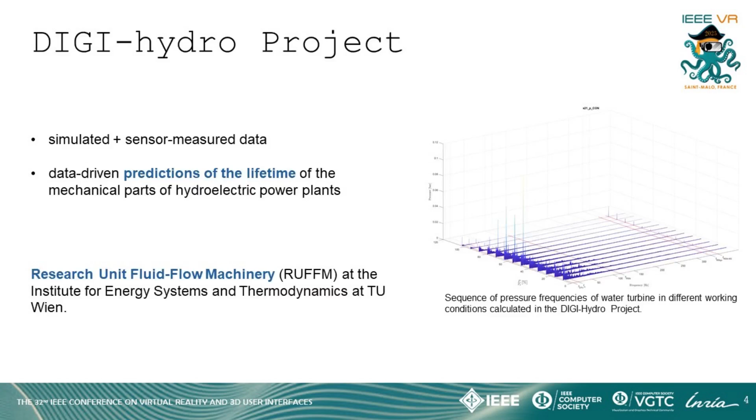The idea of an immersive analytics application resulted from numerous conversations with these experts. Two factors made them interested in an immersive environment for data analysis: the possibility of visualizing and interacting with many plots of sensor-collected data at once, and the combination of abstract and spatial data, with the possibility to locate the data visualizations in the relative position of where they were extracted.

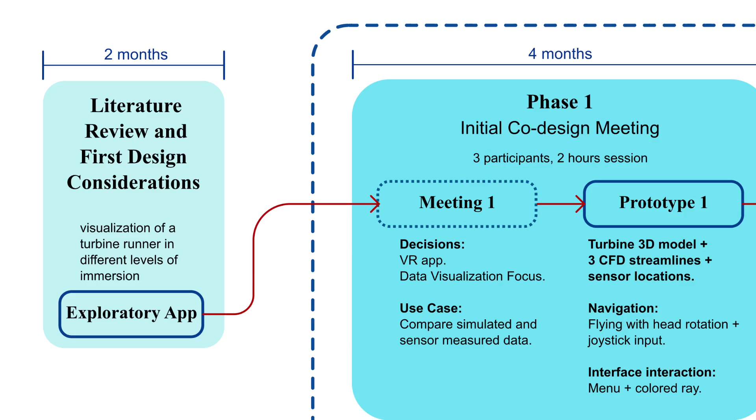After conducting a literature review, we decided to adopt a user-centered co-design approach with our project partners from the start. At first, we considered a situated analytics application using augmented reality to visualize data within the context of a real turbine. To explore this concept, we created an exploratory application that showcased various immersion levels for the experts. This application showed a 3D model of the turbine runner. Users could adjust the level of immersion by selecting different environmental backgrounds.

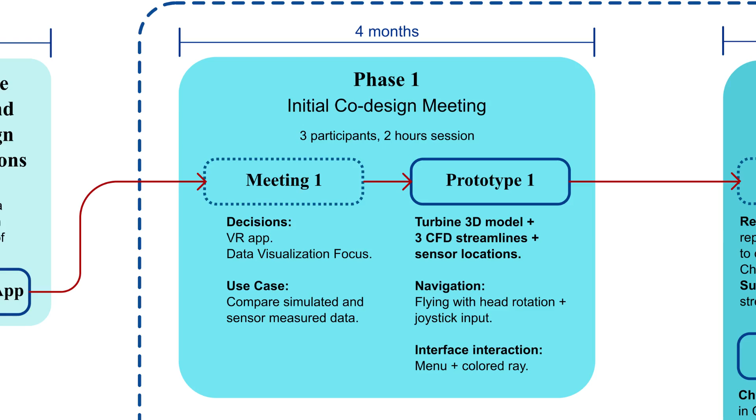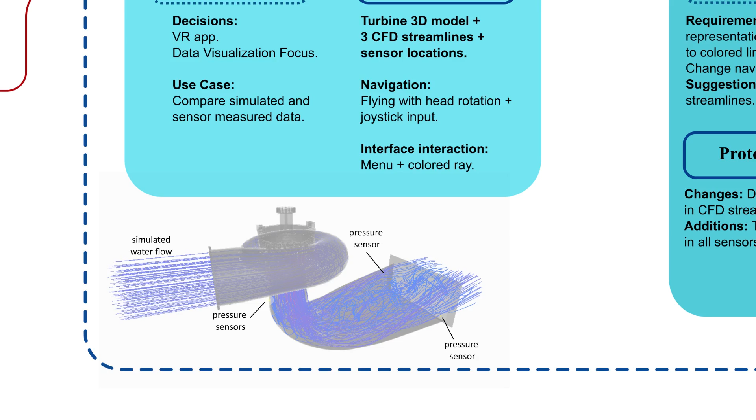In a first meeting, 3 experts interacted with the exploratory app and were introduced to the concepts of virtual, mixed, and augmented reality. The engineers rejected the idea of a situated analytics setup because the sensors are installed on operational turbines that are not always easily accessible. They defined the use case of a VR application to show a combination of abstract data from simulations and sensors in context with spatial data.

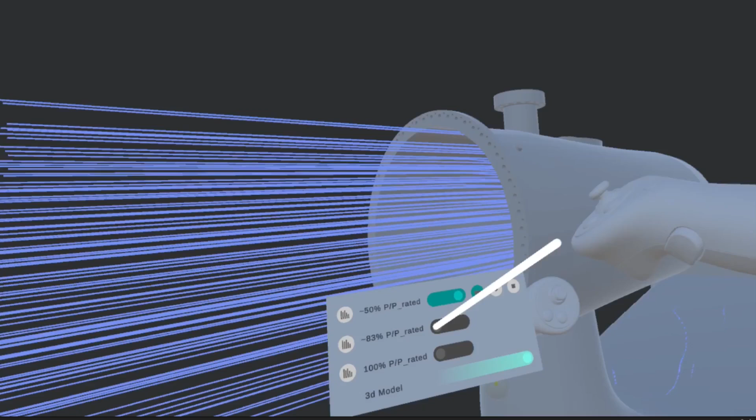In the following 4 meetings, we held short demonstration sessions to present earlier versions of the application and get feedback from the engineer coordinator of the DIGI-Hydro project. In the last phase, we developed the version of the DIGI-Hydro VR application that was evaluated in a qualitative feedback user study. DIGI-Hydro VR was developed in Unity. It was visualized in a Meta Quest 3. To create the data visualizations, we used the Immersive Analytics Toolkit from Cordeil et al.

The prototype combines the spatial data of a 3D model of a hydroelectric turbine and 2 types of abstract data: flow streamlines derived from simulations and pressure sensor data extracted from a real operating turbine. The sensor positions are marked with yellow spheres. The user can fly through the model walls and navigate through the data points.

The flow streamlines visualized come from water flow calculated with computational fluid dynamics simulations. 3 different operation conditions of the hydropower machine were presented. Called part load, the machine is operated to produce only 50% of its total capacity. Operating a machine in this state generally leads to water turbulence and increased machine damage. The machine is operated at 83% of total capacity. This is considered to be the optimal operating point for the model of the hydropower turbine used in our project.

Called overload, the machine is operated at its maximum capacity. This produces the maximum amount of electricity possible, but also leads to increasing wear and tear on the machine parts.

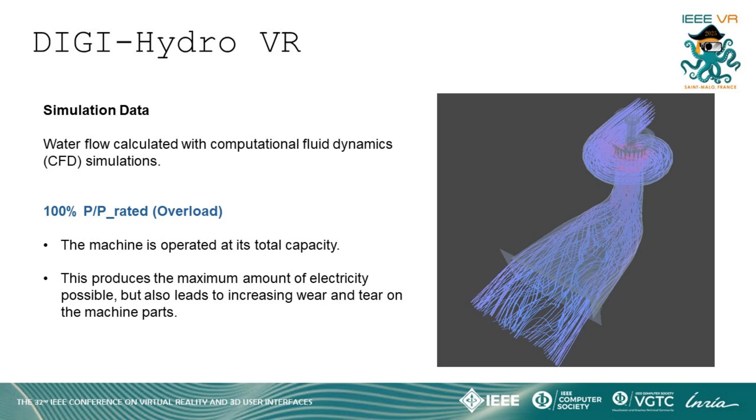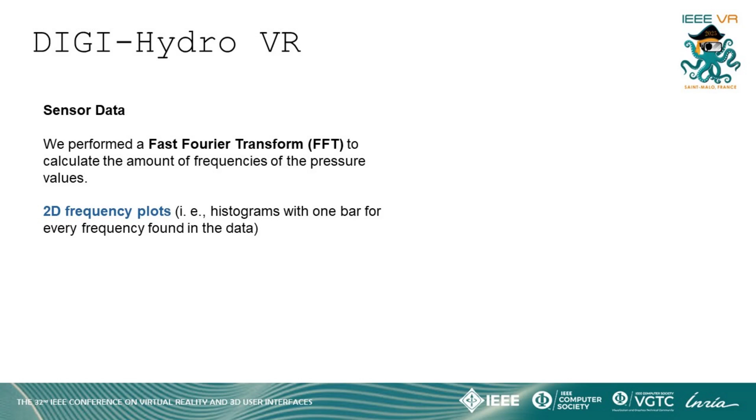The sensor data collected by the pressure sensor were extracted from a longer time series. We only considered time periods where the turbine was operating under conditions similar to those used for the flow simulations. We performed a fast Fourier transform to calculate the amount of frequencies of the pressure values. We visualized the FFT data in 2D frequency plots, that is, histograms, with one bar for every frequency found in the data.

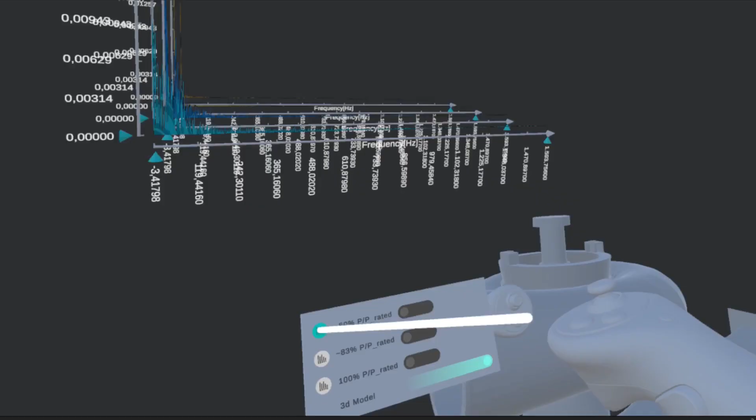Users could access the sensor data in two different ways: at the location of the sensor in the 3D model, or through a button in the menu that allowed users to open data of all sensors in a certain operating condition. Users could make copies, delete, and manipulate 2D frequency plots for data comparison.

Our qualitative feedback interviews were structured around three objectives: understanding how the data from the sensors and the simulated data is currently analyzed, addressing the potential of the immersive real-scale environments with the position of the sensors to support the understanding of fluid phenomena, and understanding the potential of VR for data analysis in the operation of hydroelectric power plants and related activities.

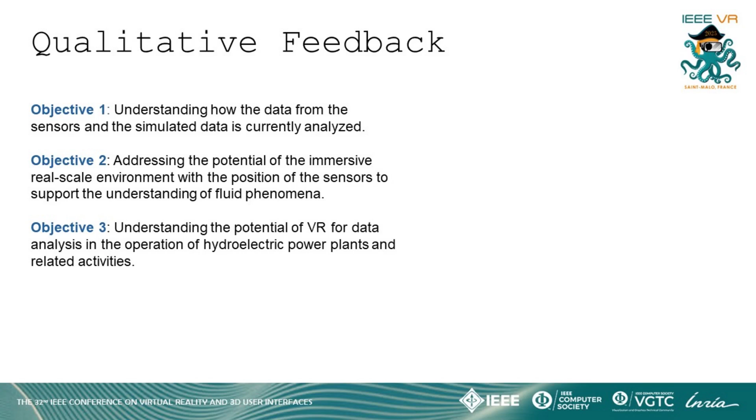9 engineers used the application and were interviewed individually in sessions lasting between 45 and 60 minutes. We conducted semi-structured interviews, supported by an interview guide with sample questions organized around the three objectives of our research.

Domain experts can gain more knowledge by specializing in one specific task or acquire a broader understanding of processes with time of work. This is translated from the comments and criticism received from the experts that we interviewed. Experts that work mainly in CFD simulations or with CAD models already have a better spatial understanding of the turbine and ask for features to speed up navigation.

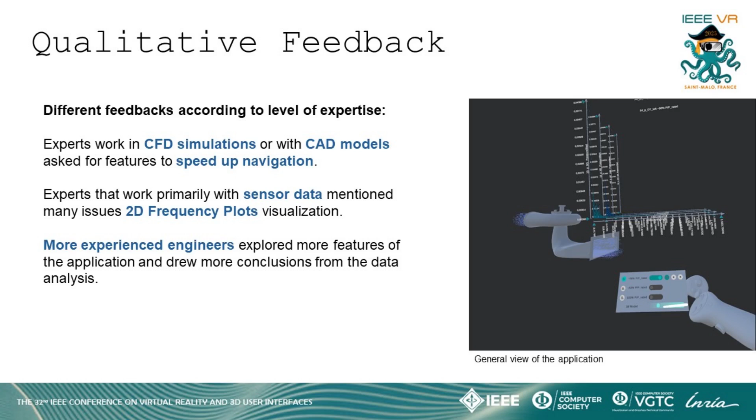Experts that work primarily with analysis of data from the sensors mentioned many issues with the plots' visualization in VR. More experienced engineers explored more features of the application and drew more conclusions from the data analysis. Combining both spatial and non-spatial data added value to the application.

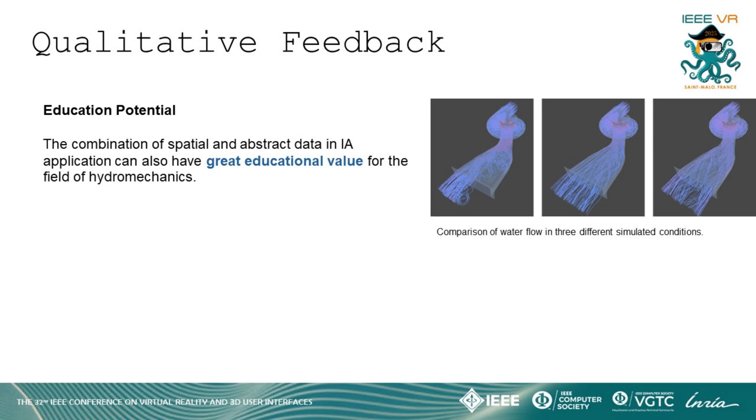Experts found it particularly valuable to explore spatial relationships within the data. This combination gave them a clearer, more overall view of the project. The immersive environment was praised for improving the visualization of certain details. Our analysis confirms the value of immersive analytics applications for presentation purposes and suggests that the combination of spatial and abstract data in IA applications can also have great educational value for the field of hydromechanics.

Our work suggests that using immersive analytics as a medium for problem investigation would create a context of use and potentially encourage domain experts to adopt the technology. Our interviews show that an expert, although with the knowledge to interpret the data, might not see the value of an immersive system when having just a partial engagement with a highly domain-specific use case.

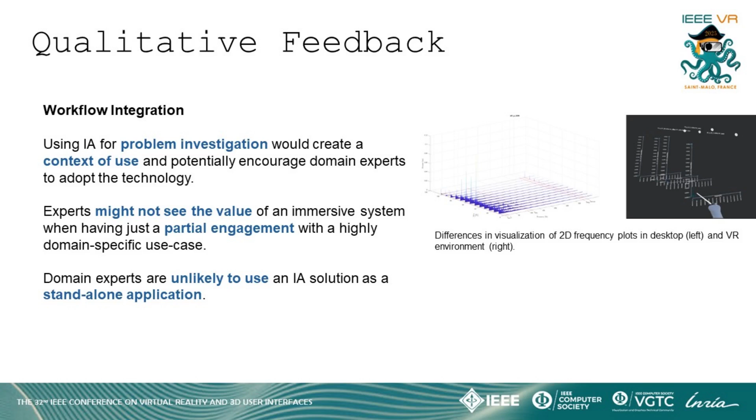Domain experts are unlikely to use immersive solutions if their routine tasks of checking data do not point out any problem. Therefore, immersive analytics applications should be envisioned as an extension to desktop applications already in use. Presenting basic virtual and augmented reality principles for an exploratory application proved to be effective. The experts confidently chose a VR setup for the application.

An effective methodological decision was not to ask experts for feedback on the interaction design, but to focus meetings on data types and their representation. In phase 2 of our user-centered design approach, we only had feedback from the project coordinator. This is reflected in some criticism of our application by the younger experts that work in more specialized tasks. In our future work, we intend to include participants with different levels of expertise in all design phases.

In summary, our main findings are: the combination of spatial and abstract data in an immersive environment gives a complete overview of the underlying problems of the field. Immersive analytics shows great potential for education. It could be used for inspecting specific maintenance issues. Domain experts are very specific about their work routines and problems, and immersive analytics applications should take this into account to avoid skepticism. Thank you for your attention, and please read our paper to learn more about our work.